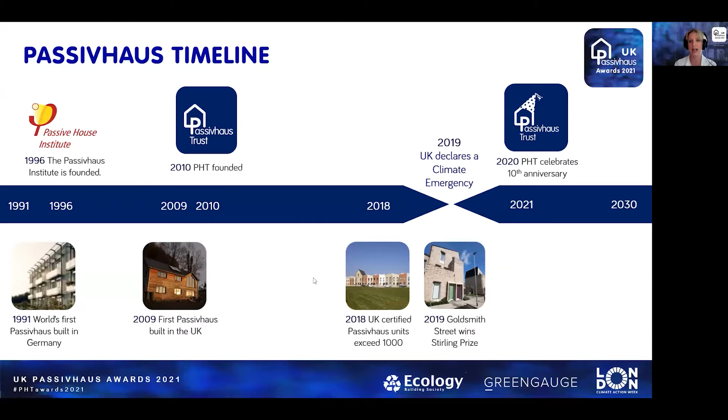The interest in and uptake in passive house across the UK continues to grow. That's most encouraging, especially as we're facing an inevitable climate disaster. We now have over 1,400 certified passive house buildings and more than 6,000 under development. And across the UK, we are seeing passive house projects grow in scale and complexity. Residential projects have gone from being single to multi-residential, new build and retrofit.

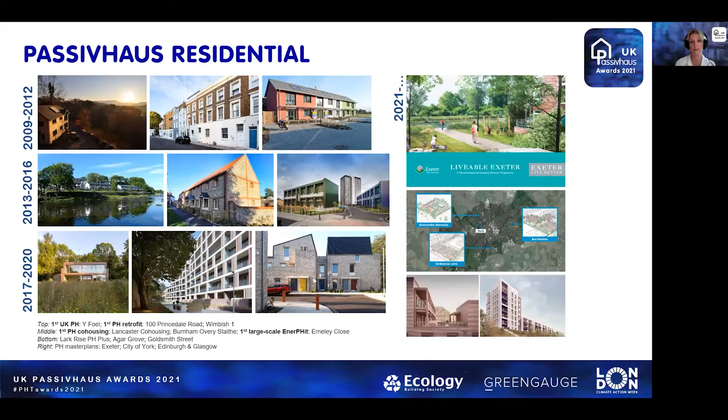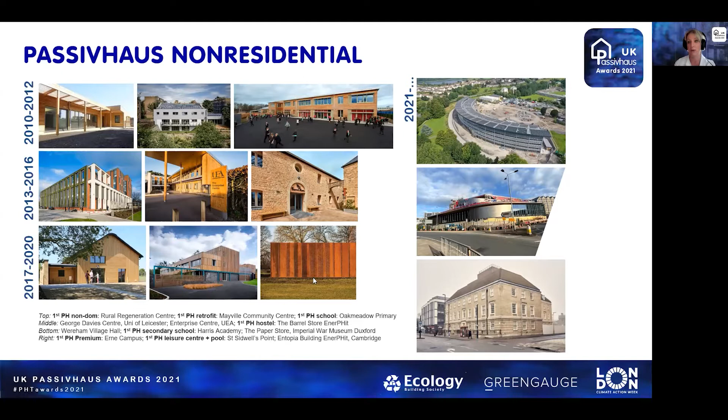We're seeing more large scale and high-rise projects, and passive houses also began to feature in master plans in Exeter, York, Edinburgh and Glasgow. Beyond residential, we are seeing a growing number of non-domestic passive house buildings, both new build and retrofit, from village halls to schools, university facilities and accommodation, offices, museums, leisure facilities and more. All of this in less than a decade.

Our programme this afternoon showcases the very best of the latest passive house projects from across the UK. You'll see 6 finalists across 2 categories, small projects and large projects, and each finalist will share a video of their project and give a short presentation on their entries. After the presentations, you'll have the chance to ask questions via the Zoom chat facility.

Now, these awards are very much peer accredited by the UK Passive House family. Our selection process has been 2-stage. A long list of entries were shortlisted by a panel of recognised and respected professionals, made up of John Bootland, Nick Grant, Hattie Hartman, Eugenie Patel and Lynn Sullivan. Our thanks and gratitude to each of them for their contributions.

The second stage was made up of 500 or so of the Passive House members who have voted on their preferences. So these awards reflect the opinions of many. Now, we do have a final category, which is the People's Choice, and this is where the wider public get to determine the outcome by voting via a live poll at the appropriate time.

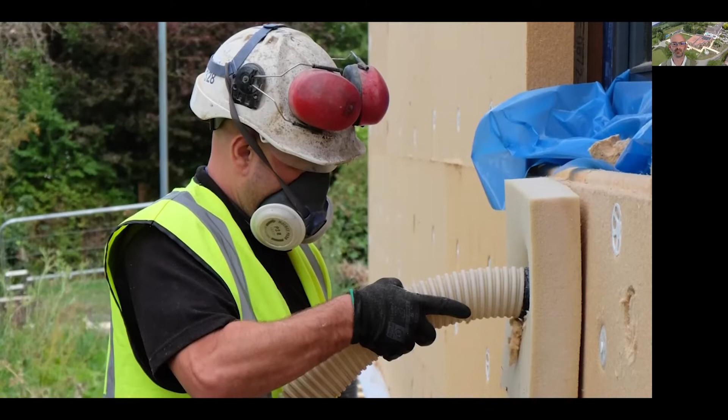It's lovely. It gives me a very nice aesthetic internally, and I've probably ended up with timber everywhere. There's nothing other than timber above ground floor. Everything in the walls as well, even the wood fibre insulation, yep. And then the larch cladding on the outside. The windows are timber, yeah. And of course along that way we also achieved some very good air tightness. The air leakage would fit on a penny coin, which is 244 times more airtight than building regulations would require. And as far as we've been able to gather, it's about the 3rd most airtight house in the world. Rather ridiculous and somewhat unexpected, because I did all the air tightness taping and it's just worked out very well.

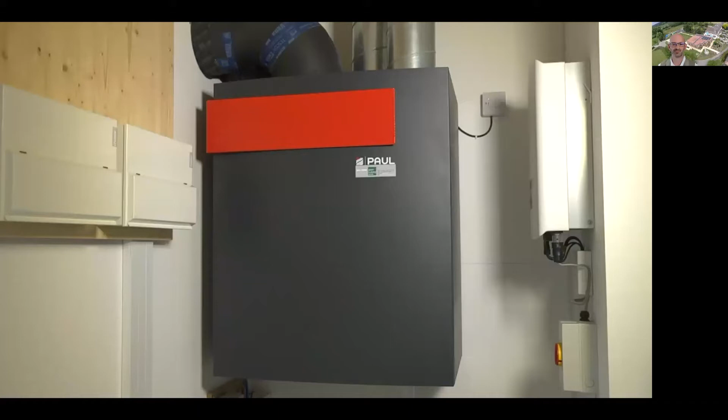So I've been through a winter. The heating went off early March and I haven't touched it since. It's very nice, very comfortable, and the air's great. It's all very even temperature around the house, which is one thing that you really notice with the mechanical ventilation, and it's really working well.

So Larch Corner is a timber lover's paradise situated in the Cotswolds area of outstanding natural beauty. The site itself enhances biodiversity with grasses and wildflower meadows, edible landscape, native tree planting, discrete permeable parking, and a sedum roof, which also attenuates rainwater runoff. From the cladding to the structure, from the insulation to even the light fittings, upfront carbon emissions have been considered. The windows frame the views, and there are 21,000 screws that fit into a design for disassembly strategy. The family home has wheelchair access, and space planning means there's privacy and a wealth of storage.

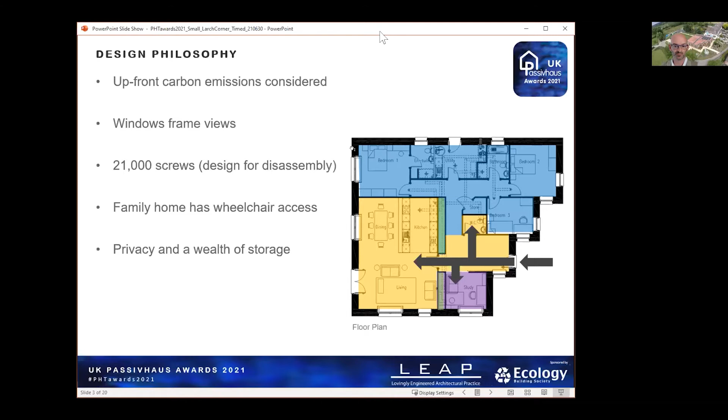Up on the right-hand side, you'll see the sedum roof, which also supports part of the photovoltaic array, and we've got a sawtooth profile that addresses the curvilinear road at the eastern side of the house, with south-facing windows making the most of the solar gains and the views available. The gargoyles on the roof gently throw the rainwater down onto the landscaping below, and the deep window reveals provide shading in the summer. The window seats that feature in a number of views allow you to take a pew and accept a view and even read a book. And the waste from the house that arose during the construction process was minimized as much as possible, and CLT, the cross-laminated timber, offcuts were used to make the dining table, for instance.

The ceiling heights vary throughout the house to accentuate different spaces, and the hallway includes space for a wheelchair and for buggies, so that Mick, an active grandparent, can accommodate his family. The storage wall has playful LED lighting, and the office has a fold-down bed, so Mick can give over the rest of the house to visiting family, and he's still got somewhere to retreat to. In terms of energy performance, of course, we tick all the passive house boxes, and most notable is the fact that the air tightness would fit on the square of a 1 penny coin. 244 times better than building regulations, 16 times better than the passive house standard would require. Needless to say, there was plenty of celebrating on the days when we got that result.

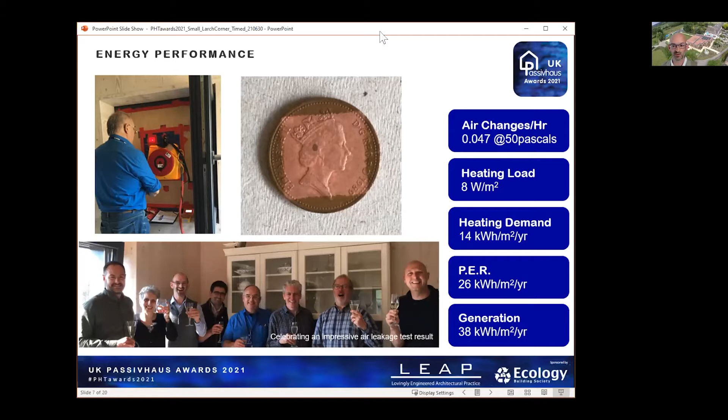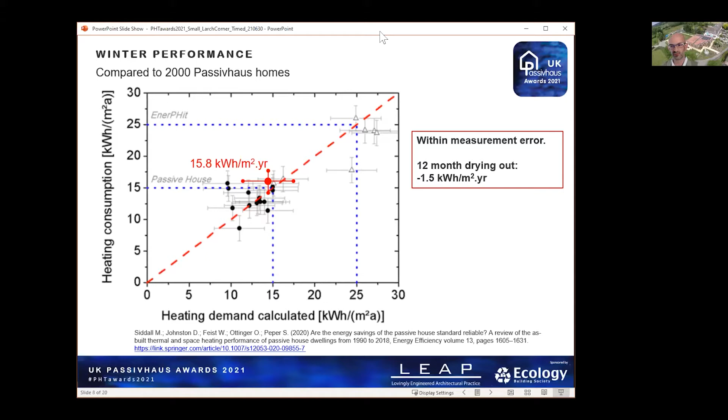In terms of the actual measured in-use performance, compared to 2,000 passive house dwellings in a peer-reviewed paper that I helped to contribute towards, we can establish that Larch Corner is using 15 kilowatt hours per metre square per annum on average, and that's within measurement error. And if we allow for a bit of drying out, then it firmly falls within expected boundaries.

In terms of summer comfort, we avoided overheating risks primarily by designing out excessive areas of glazing and designing for good standards of natural daylight. The certification exceedance of 25 degrees Celsius was expected to be around about 9%, but that was because of my undue concerns about insects inhibiting the opening of windows. In practice, what we've found is that the area weighted exceedance is 5.5%, which actually accords very closely with the Passive House Trust best practice processes there, which would suggest that the expectation from PHPP would be 4.5%. So we're in the right sort of territories in terms of correlations there.

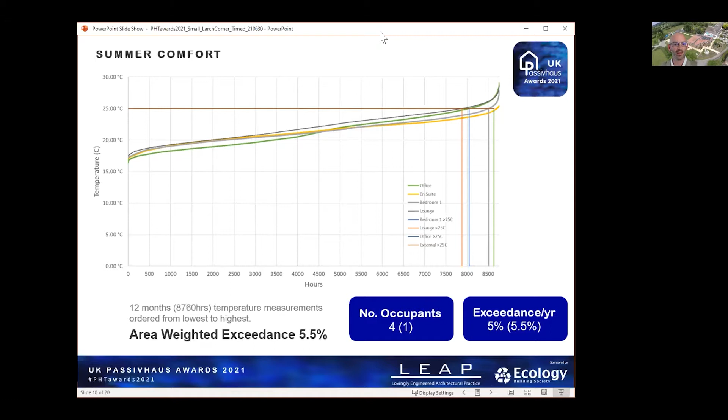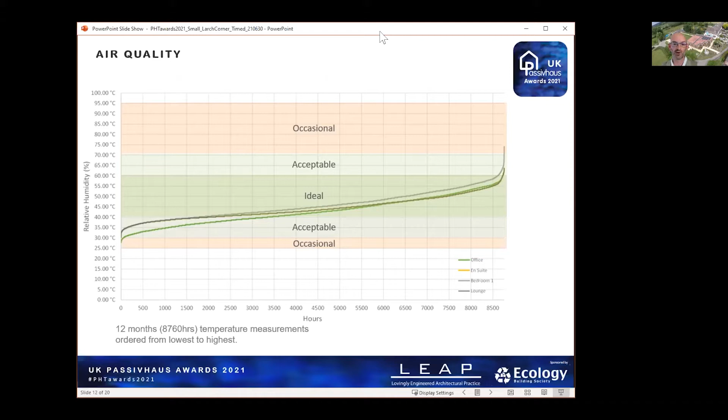In terms of indoor air quality, if we use relative humidity as a proxy, then we can see that the house remains within the ideal zone for around about 85% of the year, trimming down to somewhere between 30 and 40% for a limited period, because the house is occupied by one person, and therefore there isn't the same amount of moisture being generated as we may otherwise expect.

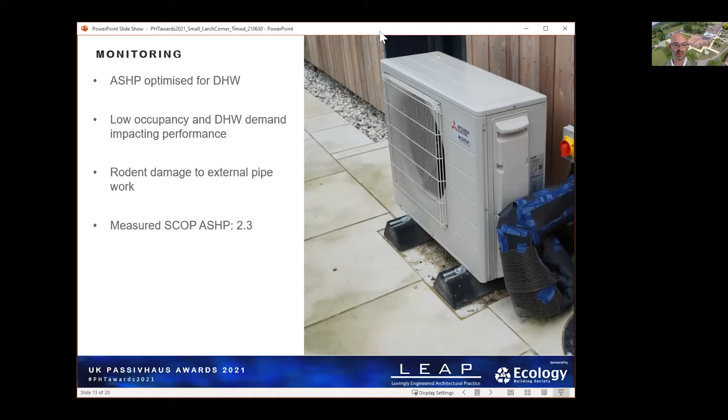So we could call this net zero in some contexts, but I think that would be a bit of a foolish game to try and argue. That's not how the ISO standards work. So more contextual thinking would be to recognise that the house achieves a 38% reduction in upfront carbon emissions compared to a masonry built passive house with external wall insulation.

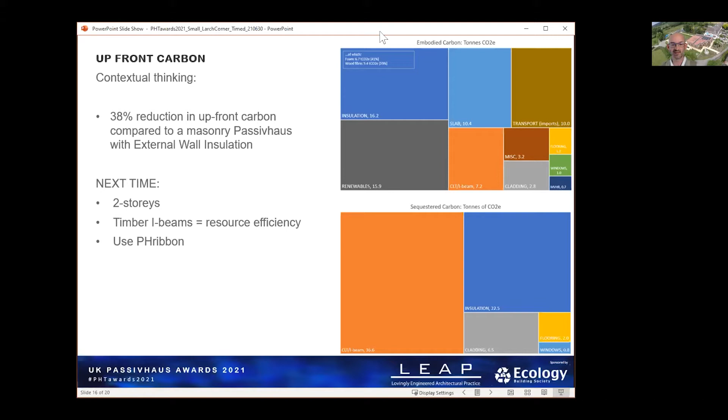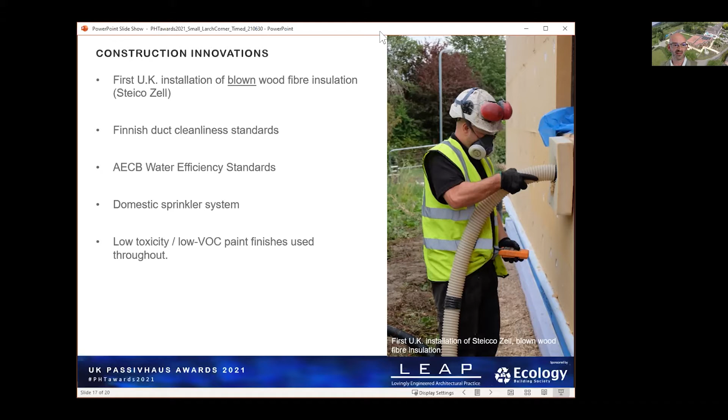Next time on a different site without the same planning constraints, we'd build to 2 stories, and we would also use engineered I-beams to improve resource efficiency even further. We'd also not necessarily invent the carbon calculation tool from scratch. We'd use PHribbon because that neatly plugs into PHPP. The house features the UK's first installation of blown wood fibre insulation. We used Finnish duct cleanliness standards to ensure good standards of duct cleanliness, because they're not picked up by passive house or building regulations. The AECB water standards were used, and we also included a domestic sprinkler system so that we could use low toxicity paints on the inside.

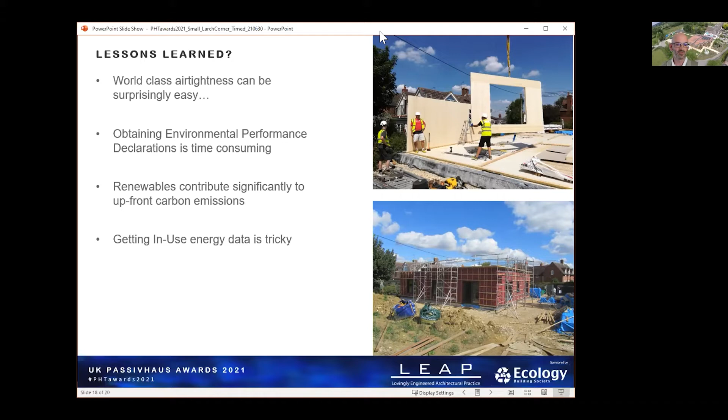Lessons learned: world-class air tightness standards can be achieved quite easily. Surprisingly, we did this by accident. We weren't setting out to achieve that. We wanted to achieve a passive house. Obtaining environmental performance declarations is time consuming, another reason to use PHribbon. Renewables contribute significantly to upfront carbon emissions, and getting in-use data can be quite tricky.

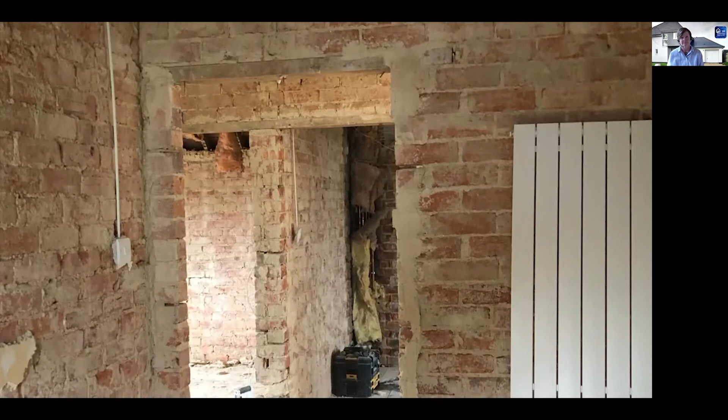One of the most interesting things for us right from the start was trying to change the mindset of the guys doing the individual work, and also changing the mindset with the sequencing. I remember you saying that you were going to target new build airtightness, even though it's a deep retrofit. And you achieved it. We said to Ruth right at the start, what do we do if we don't get it? And Ruth said, no, we will get it. Having now done it, you do it right, you do it methodically, you follow the processes, and you will reap the rewards.

Living in a passive house means that the temperature is very constant. It doesn't seem to vary very much. The house cools down slowly, and when the sun's out it heats up quite quickly. There are no drafts. And it's quiet. Yeah. And where we live is quite windy, so we've noticed that. Having measured embodied carbon on new build passive houses, even those that have got timber frames and timber cladding, your EnerPHit here is half the embodied carbon of a new build.

Thank you, Emma, for the introduction, and I'm delighted this project has been shortlisted for this award. It's been a fantastic project for us, deep retrofitting this existing building to create an ultra low energy, low carbon home for my clients, Dave and Julie. This original 1930s home is typical of much of our housing stock in low density neighbourhoods across our country, with cavity wall construction and a pitched roof. I'm delighted it was certified Passive House EnerPHit in 2020.

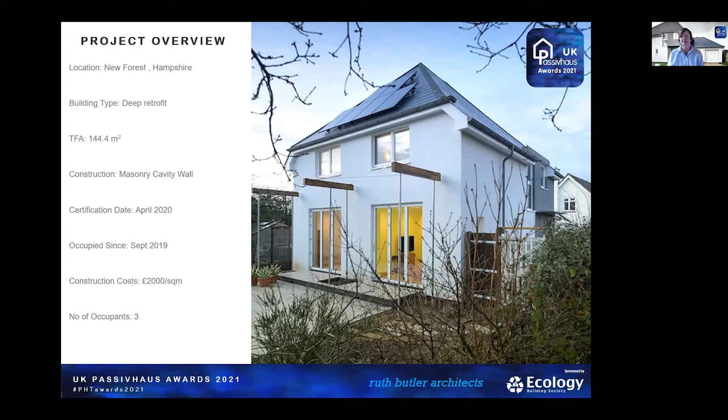Dave and Julie didn't want to move from their coastal location and from this view at the end of their road in the New Forest, but they did want a comfortable, low energy home. So we worked quite hard within the constraints of the existing site to make sure that we could achieve their ambitions.

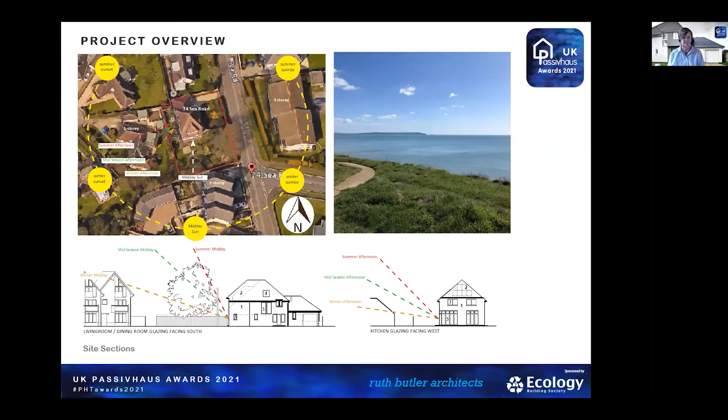The design philosophy was to create a contemporary open plan home that was super comfortable and low energy. And as keen design gardeners, they also had to have great indoor-outdoor flow. We rationalised the interior layout, we knocked down walls, and we created a new garden design and terrace. We introduced new high-performing bifolding doors to increase the amount of south-facing glazing, to optimise winter free heating, and to bring views of the outdoors in. A generous kitchen sits at the heart of the house.

It was important to create robust details for the main thermal elements and to reduce thermal bridging at existing building junctions. The walls were wrapped with external wall insulation, the wall cavities were filled, and the loft and floor insulation was added.

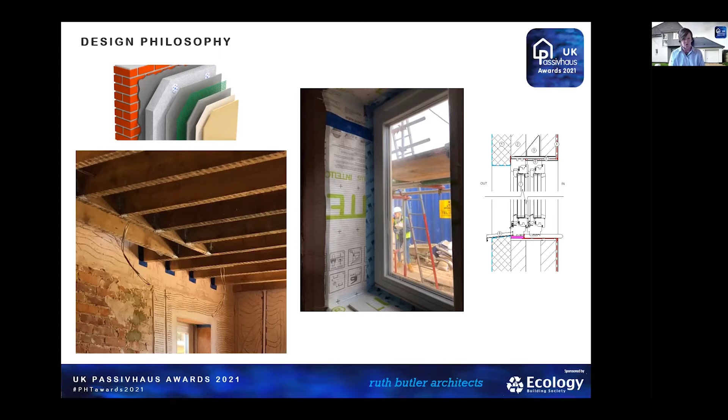The air tightness solution was a combination of parged walls and air tightness membranes for the floor and the ceiling. We paid careful attention to the junctions of the floor joists, the windows, and a new floating floor for the ground. An air tightness of 0.5 air changes an hour was achieved, bettering the new build standard.

The building services strategy was to keep it simple, reduce the amount of kit, minimise distribution of services, and adopt an all-electric solution ahead of the decarbonisation of the grid. One electric radiator is all that's needed to heat this house.

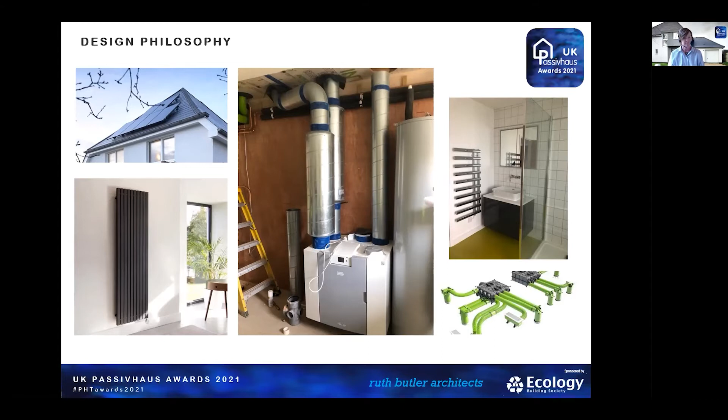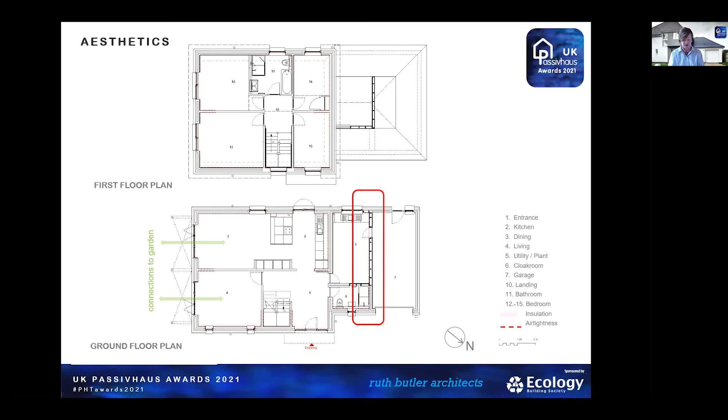These are the floor plans for the building. One of the more complex areas was thermally separating the integrated garage and providing a new utility and plant room space. We needed to find a door that was both Passive House certified and half an hour fire rated to go between the house and the garage, and discovered there was only one product in the UK available to do this.

Aesthetically, the interior remodelling brings good daylight into the heart of the house with a new open tread oak staircase, larger doors and big windows. Natural materials were chosen throughout, including cork and timber floors. To the south, a new simplified elevation removes an old dormer window at first floor level to promote better headspace in the bedrooms and give roof space for the solar panels. On the ground floor, the existing conservatory was demolished so that living spaces could connect directly to the garden.

External insulated render provides a clean contemporary line in keeping with the house's 1930s origins and the existing streetscape. And a warm, draft-free interior allows Dave and Julie to live in the whole house, no longer needing to close off rooms to keep warm.

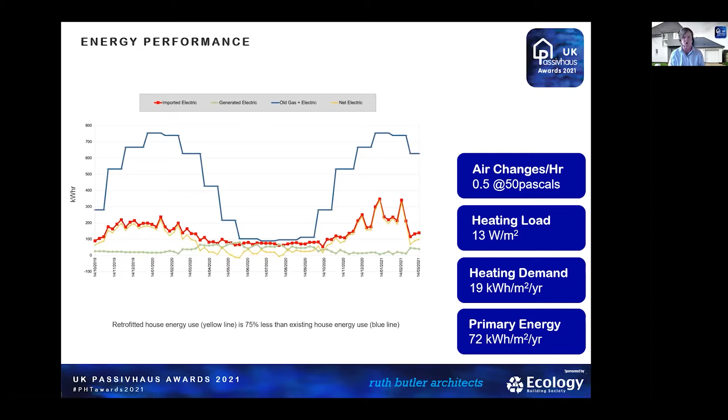The client has been monitoring energy for over 2 years now, and the graph shows the monthly kilowatt hours for a 1-year period. The retrofitted house whole energy use is the bottom yellow line, and the pre-retrofit energy use is the top blue line. And the house now uses 75% less energy than it did before. The combination of winter solar gains and 1 radiator is enough to keep the house fantastically comfortable and draft-free in winter. And this is much valued by Dave and Julie, who previously struggled to keep warm, wearing jumpers and slippers for most of the year.

The summer shading is achieved with a deciduous planted arbour, connecting the house to the garden and giving a shady spot to sit, while the existing masonry walls provide good thermal mass and coolth to the interior.

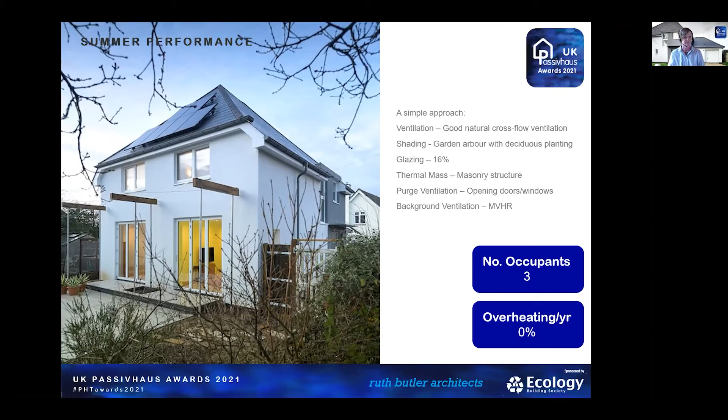One of the key challenges for the project was following the insulation and air tightness line through a myriad of existing construction details. Particularly difficult was the ceiling skeilings at first floor level and also the internal garage. We used PHPP to test the options and make sure that we were in compliance at all times.

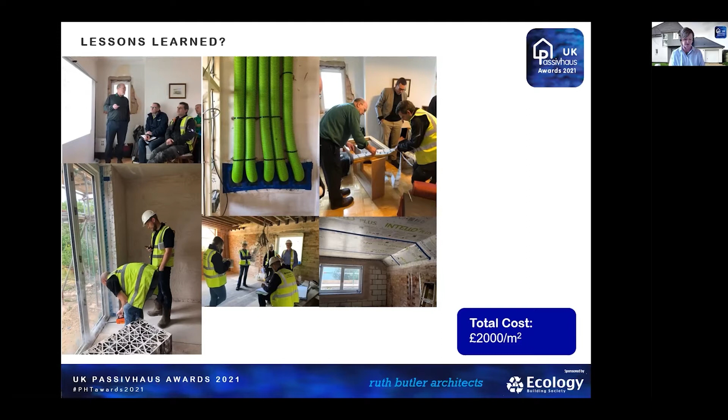So in terms of lessons learned, the 3 key ones were that the pre-construction workshop that we held before we started on site was pretty essential for team building. The M&E installation could have benefited from closer supervision on site. We had a couple of things we needed to keep an eye on. And the Air Tightness Champion was probably the most important person on site.

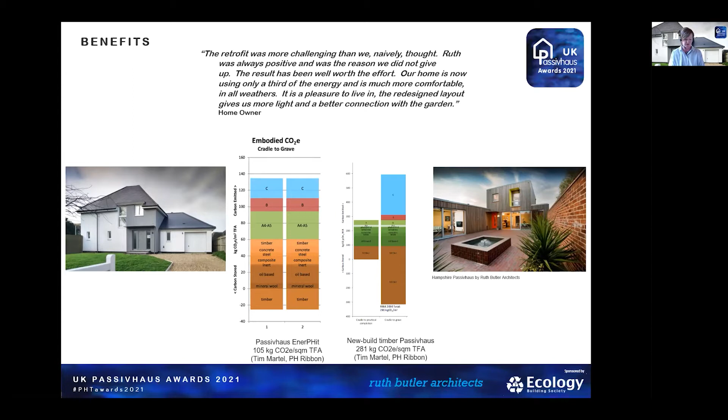Dave and Julie are delighted with their new home. It secures their retirement future in this much loved part of the country. And for me, measuring whole life carbon has been an important benefit. This deep retrofit is less than half the embodied carbon of a timber frame new build. This is a ready to deliver example of the performance and comfort that could be achieved across the existing UK building stock by deep retrofitting to Passivhaus EnerPHit standard, meeting the government's targets to achieve net carbon zero by 2050.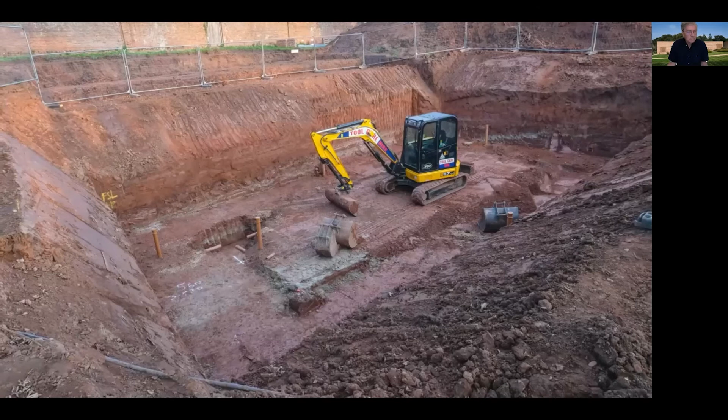So good afternoon. This is one of those now for something completely different moments, as Emma said, because I'm the client and not the architect. Or at least I'm one half of the client and not the architect.

So our project's a new build in Devon, designed by McLean Quinlan. It's around 360 square metres TFA, single-storey house with a partial living basement under about a third of it. We bought the plot in late '14, started building in late '17, and moved in at the turn of '18-'19. So we've been in here for a couple of years now.

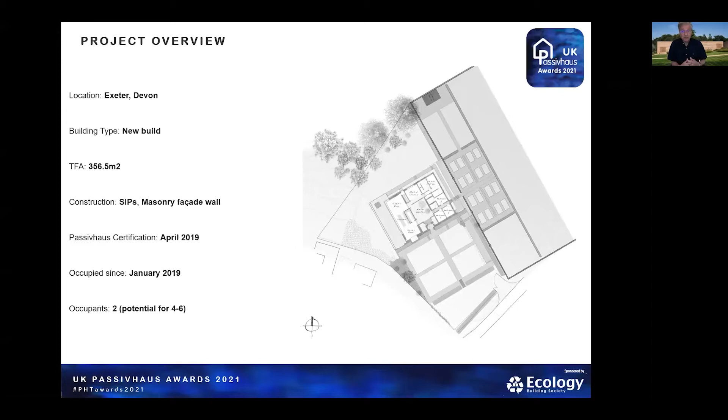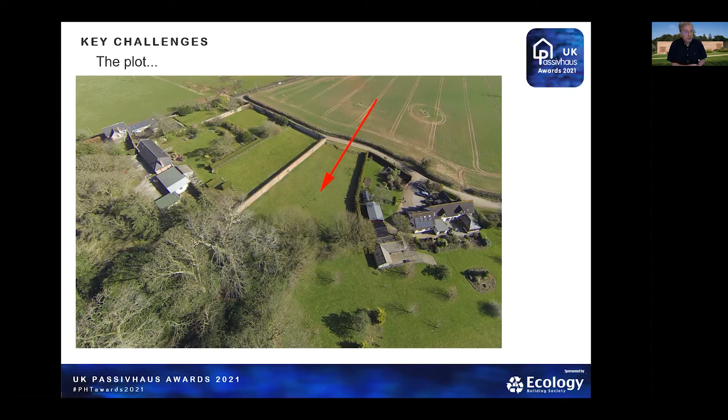The first challenge was the site itself, which, as you can see, is dominated by this tall red brick wall of the old kitchen garden. But the big challenge was that local planning declared it to be an isolated house in open countryside. So we had to go the paragraph 55, now 79 route of the National Planning Policy Framework. And this in turn meant that an independent design review panel had to determine that it was truly outstanding architecture, raising the standards of design in rural areas.

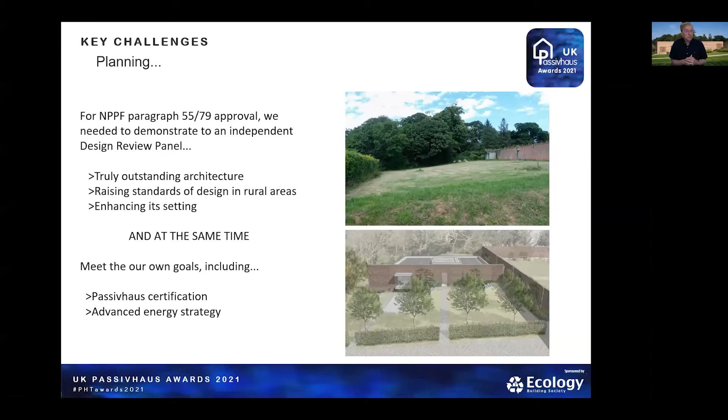And then, of course, we had our own client brief, which included Passivhaus and energy goals, which were not necessarily complementary to the Para 55 requirements. But we succeeded in getting that. And here's the house that McLean Quinlan designed. The front facade wall is designed to marry to the old kitchen garden wall. And I should also say that our landscape designer was my wife. So she's done a lot of planting in that.

And the other side of McLean Quinlan is, as well as designing the externals, they design all the internals of the house. So that's the decoration, the interior joinery, lighting, kitchen, and all the fittings. And we've used a lot of natural materials in the house, including pure clay plaster, which is very nice to look at, but also a much more sustainable alternative to normal plaster and paint finishes.

And erection on the site was a manual process done by a team of 5 who basically constructed most of the house, including floors and roof. At the same time, all the windows, roof lights, and the final roof membrane were installed. So we went from bare slab to first fix in about 2 months.

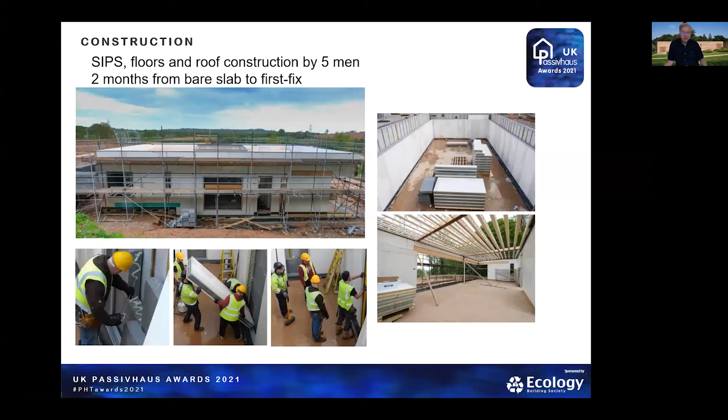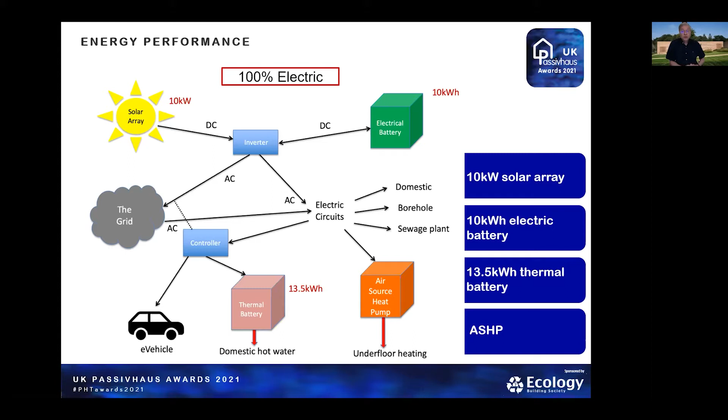Looking at our energy system, we're 100% electrically powered because we have a private borehole and a private sewage plant on top of the usual domestic circuits, including the ASHP. So we just have one utility company to deal with for all our outgoing bills and our incoming feed-in funds. We also use thermal and electric batteries to optimize our solar power use, and we have an e-car on order.

So after 2 years experience, performance has exceeded expectations. The headlines are that we're around 40% power positive, CO2 negative, and running cost negative. Unfortunately, we couldn't go for Passivhaus Plus because of our relatively large footprint, as we're mostly single storey, as you saw.

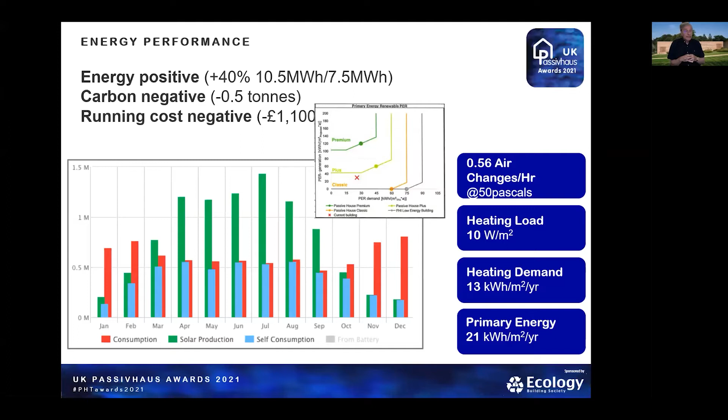Now, as well as the house, the landscape contributes to our ecological performance and carbon offsetting. We've done a lot of planting, including well over 100 trees and over 300 metres of hedges. And after many years, the kitchen garden's now supplying food again. The birch copse on the southwest is also intended to provide solar shading. Obviously, the more so, the more it grows.

Summer overheating was noted as a potential risk by our certifier, but one that could be ameliorated by window and door opening. And in practice, we found that we can control it. We cut radiant heat by closing the big blind over our central roof light, and also the roller blinds and the Venetian blinds in the main living room and in the bedrooms.

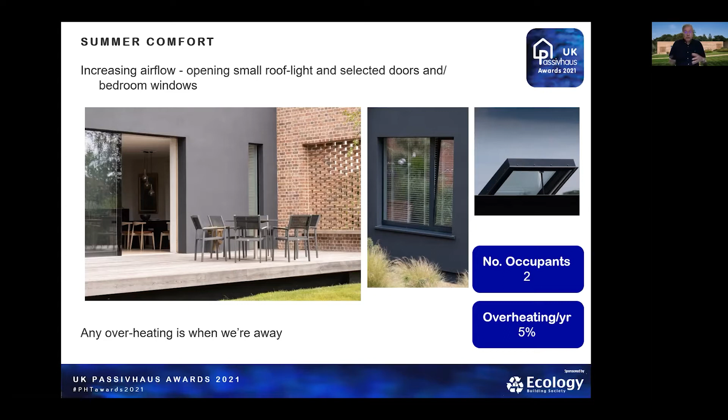And then we get airflow going, usually by opening a relatively small roof light on the roof and a sliding terrace door, and possibly other doors and bedroom windows. There's a door on each axis of the house, so we can usually get cross ventilation going quite easily. So almost all our overheating turns out to be when we're away, meaning that we can't open the doors and windows. So in winter, I think the subjective thing we notice most is that we're often surprised when we step outside and find that it's cold.

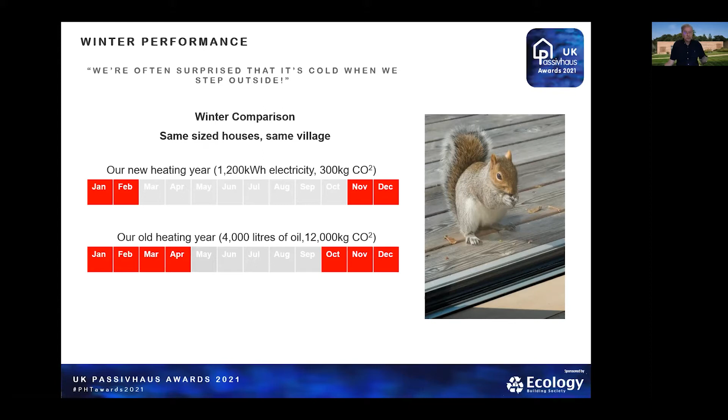And we can also do a direct comparison with our old house, which is a couple of 100 meters away, in that our heating year is now 4 months rather than 7 months. And we're generating only about 2.5% of the carbon dioxide that we used to generate. So overall, the benefits, both comfort and performance, we found have easily delivered on the Passivhaus promises.

And one thing we've found in personal behavior is that we've started modifying our behavior by watching the solar array monitors, a bit like you modify your driving behavior when you watch the battery in and battery out on an electric car. So as was said, Passivhaus certification was a first for the architects and builders. So that in itself meant a lot of lessons were learnt.

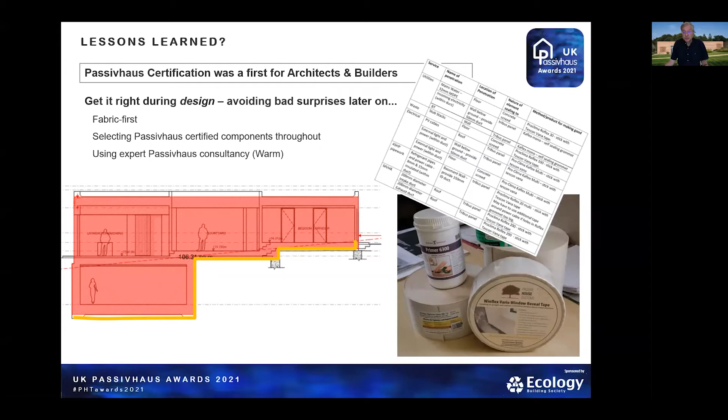And we tell anyone who went down this path that getting it right, testing it with PHPP in the design stage is absolutely what you need to do. And as a result of doing that, we had no nasty surprises later on. We had a great team and everyone was on board with the Passivhaus goals and techniques. And also, since many of the main components like windows were Passivhaus certified, the subcontractors fitting them tended to bring Passivhaus know-how and experience to the project and pass it on to the less experienced teams. That was because there was good communication and a good relationship between all our teams.

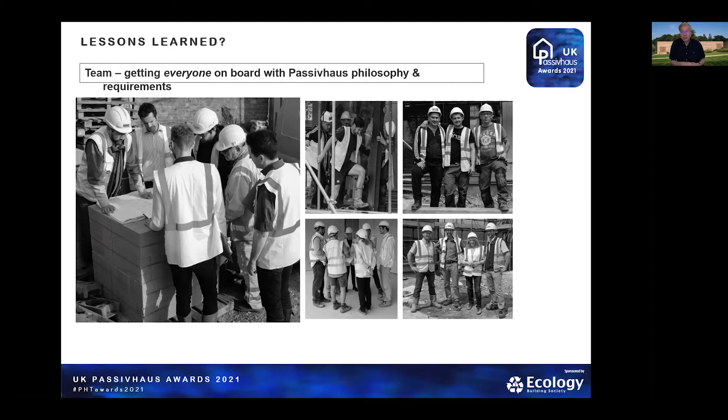And the other thing we learned, of course, was that a critical component is the Passivhaus champion. And for us, this was our project manager, Russ Hancock, who became a convert from the start. He did the training, kept the book on his desk, trained the subcontractors, and where necessary, he checked everything and everyone every day. And personally, he even did a lot of the taping at the end of each day.

Now, recently, Justin Bere made a good point in a RIBA conference that beauty and performance are entirely compatible. And the RIBA Awards are increasingly requiring the Passivhaus approach as they head to their 2030 challenge. And it's great for us that we're currently shortlisted for the awards. Of course, we're not the first in this respect, but we're still very much in the minority. And we believe we can help spread the word.

And one of the ways we've done that is by getting into a lot of architectural journals. And I've given talks to local eco groups on Passivhaus. And also we've chosen Passivhaus in our project name to draw attention to the Passivhaus aspects of it, even though I can assure you it's not the name that's on our gate, although we have the plaque right near our gate.

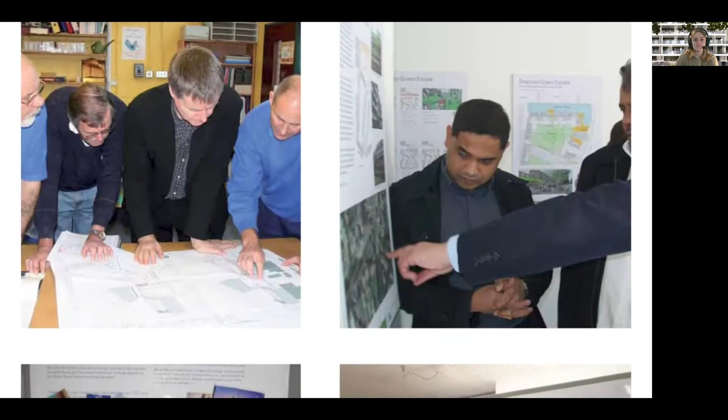Before the development, the estate was a number of H-shaped blocks, and the homes were cold. They had lots of damp, very drafty windows, expensive to heat. We consulted with the community. Once we understood that residents wanted comprehensive redevelopment, this would be Camden's largest regeneration redevelopment scheme. And so there was a desire to do something extraordinary.

One of the things that's really struck me about this process is actually the comfort and the positive benefits that a passive house building can bring. It would address the fuel poverty on the estate. It would mean that we invested in more passive measures, and we already had to do some of those things, so triple glazed windows because of the railway. It's been absolutely great that we've been able to demonstrate it on this scale, and with the future master plan of nearly 500 units we're going to be at soon.

One of the really informative parameters for the master plan actually wasn't passive house. It was actually keeping the community together. So everyone stayed here. They watched their new home being built and then moved in. And what that meant was the master plan's quite granular. It's like a puzzle where we did it in quite small phases.

The palette of materials is deliberately simple. It's brick, concrete, banding, a little bit of muted colour. And when you look at the future phases, they sort of use the same DNA. This generous balcony that goes across the whole width really helps the control of solar gain from the south. And that's just demonstrating how really well thought out solar shading can actually help.

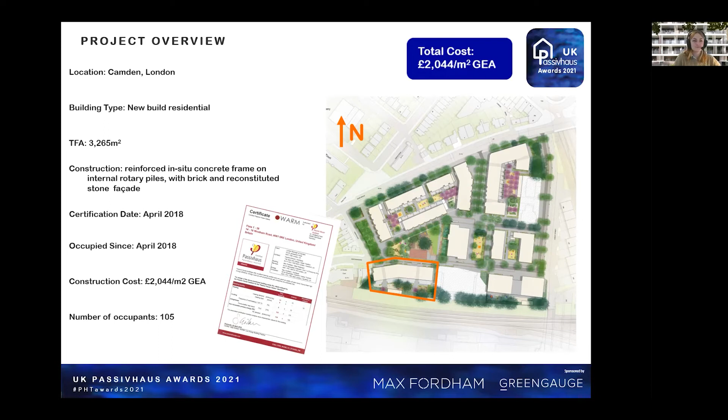The success of the project wouldn't have been possible without a massive deal of effort from a cast of thousands who I'm representing today, and from the amazing spirit of collaboration that we all shared on the project. Another key factor in success was the fact that the Passive House brief was championed and supported by Camden, our client, throughout the design process.

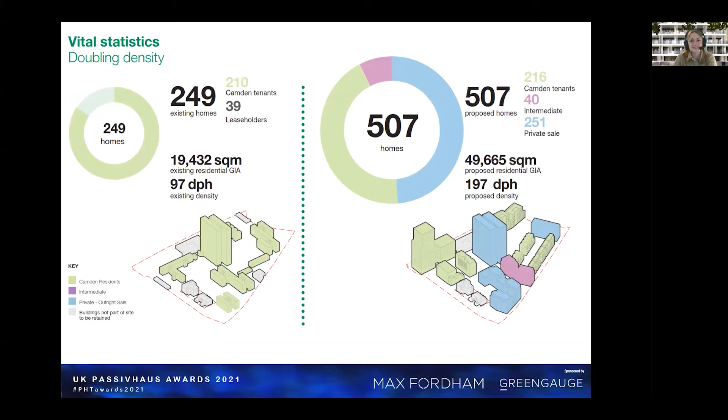The existing homes on the estate were undersized, as well as poorly laid out and disconnected from the wider context. The local residents voted for redevelopment, and the proposals double the density of homes on site, which leads to bigger, better, low energy and fit for purpose homes for the existing residents, subsidised by the market sale homes. This is a visualisation of what the regenerated Agar Grove estate will ultimately look like, and the site is bounded by 2 railway lines. Phase 1A is completed, 1B is about to be finished, and 1C has started on site.

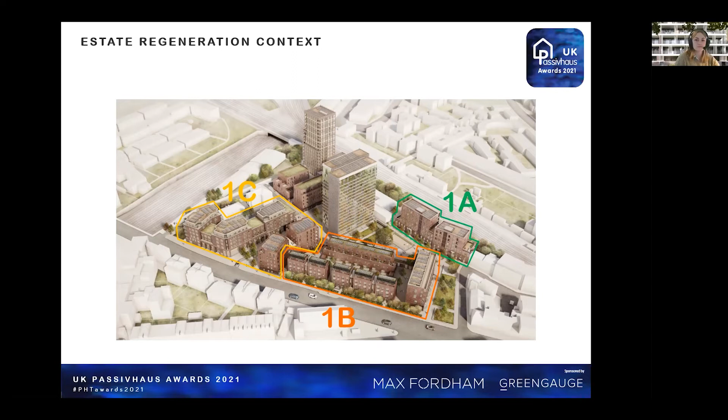At the heart of the design philosophy was Camden's goal to tackle fuel poverty and to provide low carbon homes, improving the quality of life for the estate's residents. Another key design principle was simplicity, using an efficient form and good detailing to simplify other aspects of the design and to reduce maintenance requirements and life cycle costs.

The existing estate was home to a thriving community, and it was important to Camden to retain this. The master plan was developed around a single decant promise, so the residents would be able to stay on site and move straight into their new homes, which has led to a series of smaller development phases, with 1A as the first part of that.

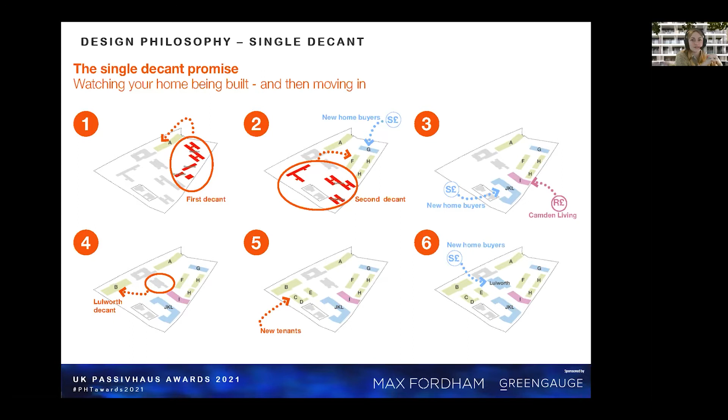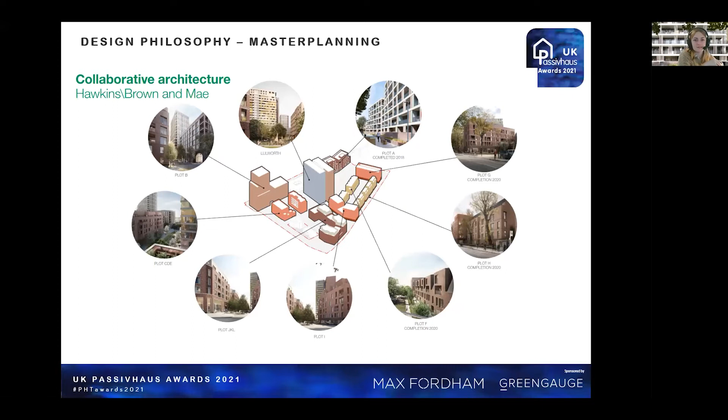Hawkins\Brown and Mae worked together on the master plan to provide different but complementary visual identities around the site. The design creates community through a series of streets and squares, and with an awareness of the wider context of the surroundings. Block 1A has a north-south orientation, which is well suited to Passive House. Some of the other phases have different orientations, which will be more challenging.

During the planning, we proposed that a Passive House development with communal heating would perform better in use than a non-Passive House development with district heating, even if they looked similar in SAP models. Our research was enough to persuade the GLA and to obtain planning permission for one of the first large-scale residential Passive House buildings in the UK.

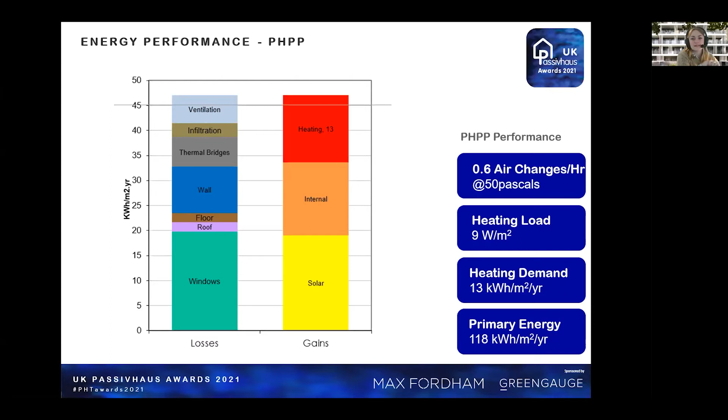And here is phase 1A's energy performance from PHPP. It was deliberately designed to come in a little under the classic targets to allow for the unexpected. The actual occupancy for the site in use ended up being larger than we expected in the model, with 105 people in reality compared to 81 from PHPP.

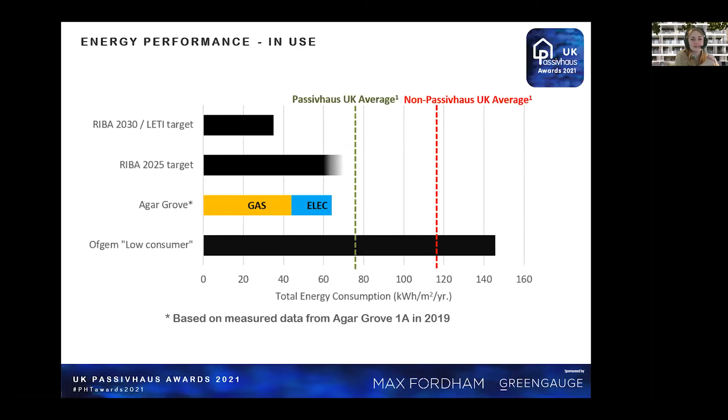Agar Grove's measured energy use achieves the RIBA 2025 target, or it did until about a week ago when the target got reduced. The performance is lower than the UK average for Passive House buildings, based on research from the Building Performance Network. And in order to get to the 2030 target from RIBA, we would require a low carbon heat source.

Our in-use heat losses ended up being higher than we had modelled, and this was partly because the boiler flow temperature had to be increased slightly to improve the controls operation and the stability of the HIUs. The performance is good considering that it was designed before the CIBSE Heat Networks Code of Practice was released, but there is room for improvement.

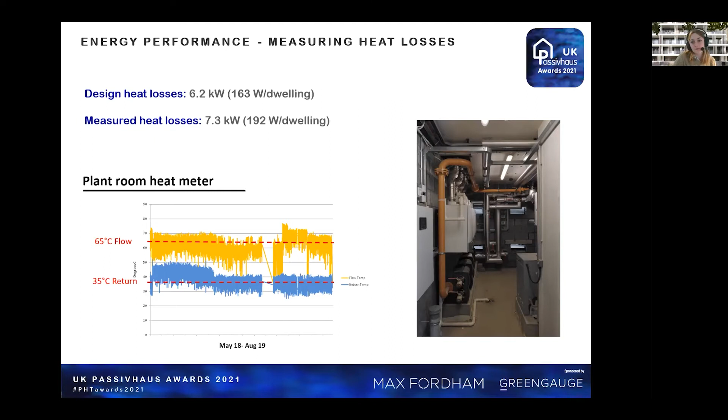We monitored the temperature and other parameters in 3 sample flats, and the data demonstrates that the temperature never drops below 20 degrees in winter. The winter heating strategy also benefits from solar gains coming through the generous south-facing balcony windows that are shaded by the overhanging balconies in summer.

A little more on the summer comfort strategy is that it was based on a few key principles. Firstly, minimizing internal heat gains, which was done through insulating pipework effectively, creating a lean pipework design, minimizing lateral distribution pipes, and with low LTHW running temperatures. The glazing was strategically sized with the balconies blocking peak summer sun, and we had large openable windows for purge vent.

The flats provide comfortable, spacious living environments for the residents. And feedback collected by occupant surveys showed that people noticed a real improvement in air quality and that the residents love the spacious balconies and the secure rear garden.

The northern facade has less glazing than conventional multi-residential projects, but it has insulated side panels which make the openings look more generous. The shared entrances have a view all the way through the building into the garden at the rear. And due to the narrow gauge of the block and the internal glazed screens, this allows views and ventilation through the whole building.

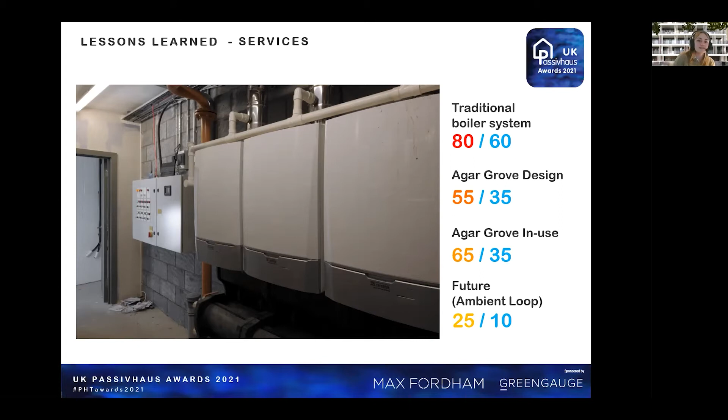Running communal LTHW systems, such as our boilers here, at lower temperatures pushed the then available technology to its limits. And you can see a range of temperatures in degrees C of a range of different systems on the slide. Heat pump systems with ambient loop distribution would be optimized to operate at these lower temperatures and are being used on Agar Grove Phase 1C.

I'll wrap up by saying Agar Grove Phase 1A has collected various awards in its lifespan so far, and it has paved the way for future large-scale Passive House developments, proving the concept and contributing to overall upskilling of the industry. Thank you again to everyone who made it possible, and thank you for listening to this presentation.

Thanks, Katie. Okay, we've got plenty of questions that have come in for this project. So I'm going to kick off with questions, firstly from George. George's got a question on whether or not you've had any feedback from residents on how the homes are performing now during warmer summers and potential heat waves.

Yes, so we have carried out a couple of occupant surveys. The whole design team collaborated on these and it was led by Camden. So we had questionnaires and we went around knocking on doors, asking people both qualitative and quantitative questions about their experiences, as well as the monitoring that we had. The summer that we did that was one of the hottest summers that we had on record. It would have been 2018. And we found that people had, in some cases, been experiencing quite high temperatures.

And so it was part of working with the residents, because in passive houses the ways to keep them cool are perhaps different to what people might expect in older, leakier properties. So things like helping people understand that closing the blinds to block out the solar gain might be ways to keep it cool. But unfortunately, we haven't yet been able to analyze another round of data to see if that improved the next year. But yeah, I think it was mixed, and we're hoping that it will improve over time as people figure out the best ways to keep their flats cool in summer.

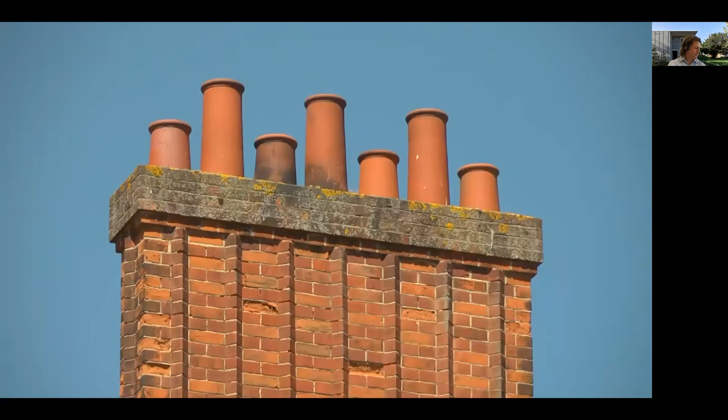We couldn't accommodate many of our graduate students, but we also don't have a great deal of land to develop on. This, what effectively were 3 large gardens, lent themselves to developing. We're in the West Cambridge Conservation Area, an area which is very prized and very heavily protected by the local planning authority. So we had to work very carefully, creating buildings that wouldn't harm but would improve the conservation area over time. But what the students wanted to achieve was a low carbon output, and their target really was to not have any gas in the building at all.

Kings are used to owning buildings and maintaining them for decades and hundreds of years. We were looking at what's the best value for the college over the kind of timescales that they're used to thinking of, and so Passivhaus became one of the options for that discussion. If you remember, we went to Norwich, looked at the enterprise building, and I remember the minute I walked into the building I was sold. I said, yes, this is going to work for our students.

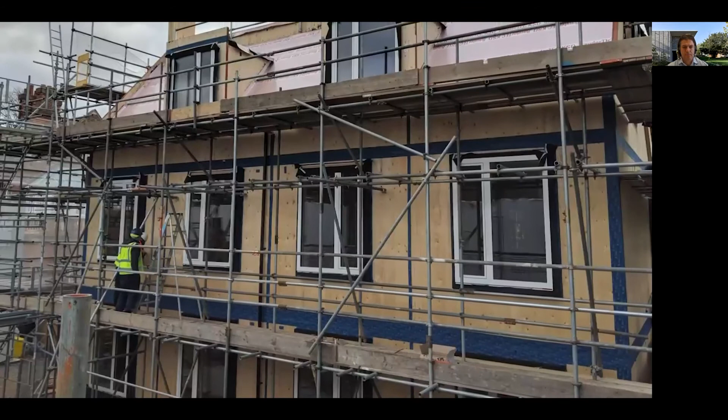And I think the challenge from the project's perspective was marrying that environmental performance with an architecture that is permissible in this part of Cambridge. There's 2 kind of architectural responses and skins over the building, but the skeleton of both of them is the same timber-based CLT construction, so that's worked really well in terms of limiting the embodied carbon of the scheme, and also was a great way of getting the air tightness that we needed to achieve Passivhaus. 2 lovely old buildings is now 4 amazing buildings that will accommodate 45% of our graduate community.

We saw the difference when comparing it to houses where we were living in before. The room is soundproofed, the temperature is always under control. It was a nice space to live in. A number of other colleges are now looking at going in this direction, and I think it's important that we do for the future.

Everybody, here we go back on. Great, thank you very much.

Hi everyone, I'll be talking about Cranmer Road, which consists of 2 new build graduate accommodation buildings for King's College in Cambridge and some associated landscape works. The buildings were occupied in late 2019, so just in time to get nicely bedded in before a global pandemic hit. The genesis of the project was King's need to accommodate their growing student population. So before the project, they could house only about 50% of their graduate students. There's limited real estate within Cambridge, so developing on land the college owned was attractive, and there was also an opportunity there to help develop the student community on the site.

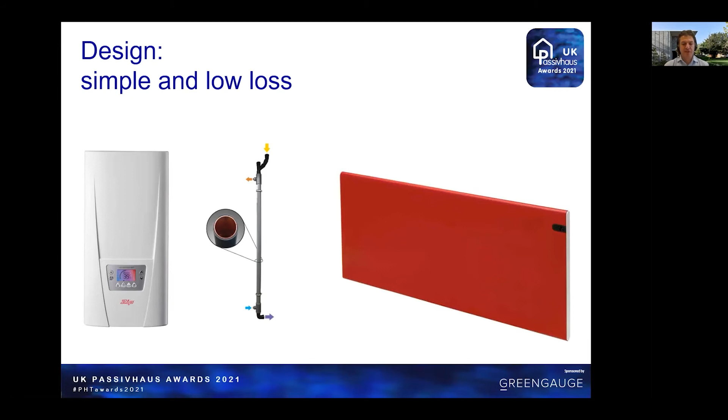The energy strategy of the buildings was designed to be as simple as possible, so efficient and to minimise distribution losses. Domestic hot water is produced by instantaneous point-of-use water heaters with wastewater heat recovery and low-flow sanitary ware. Space heating is by electric panel rads with local control.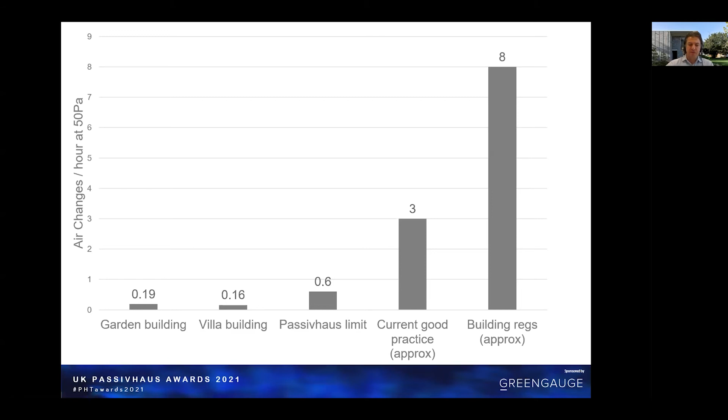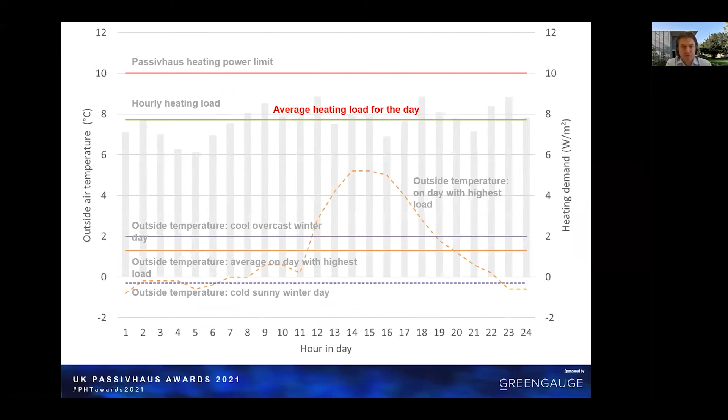We measured the day with the highest heating load, which is shown on the graph here. So the outside air temperature shown in the horizontal lines for the orange, and that was in between the 2 days that PHPP uses as a test. The average heating load, so the green horizontal line, was just under 8 watts a square metre. So we're happy with that compared to the Passivhaus targets.

Although the peak heating load was low, the heating demand figures have been a bit higher than predicted. And we think this is largely due to students wanting their rooms hotter than 20 and learning how to override the temperature controls on the radiators to achieve this. We're using a modified system in subsequent projects to give students some control, but reverting back to a reasonable base temperature after a few hours.

Another lesson learned has been around student showering. So PHPP is based on 5 minutes per shower, 0.7 showers a day. Energy Saving Trust figures suggest, in the UK, it's about 7.5 minutes a shower and 0.8 showers a day. And feedback from students shows plenty of them take more than 20 minutes because that's when the lighting controls plunge them into darkness.

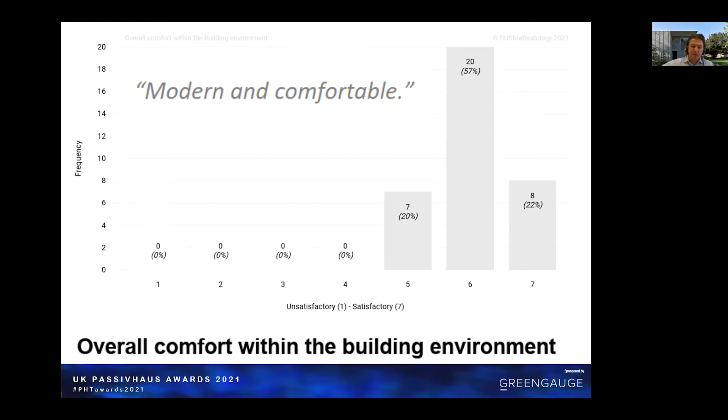As you'll have heard from the video, the feedback from the college has been positive. They're developing buildings elsewhere in Cambridge, including another project with accommodation for 60 graduates and 24 apartments for fellows. Following the Cranmer experience, this project is also pursuing Passivhaus and incorporating a lot of the lessons learned from Cranmer.

One of the things we've liked beyond the buildings and the landscape themselves of the project is the legacy that it's generated. So all of the original design team are now working on other Passivhaus projects, sometimes together and sometimes apart. This is one of the earliest Passivhaus projects for us at MF, and it's the first for both the architect and the structural engineer as well.

And it also seems to have contributed to a spread in Passivhaus within the University of Cambridge. Obviously, we're not claiming sole credit for this. There's a national increase in Passivhaus, which is brilliant. But given all the discussion around exponential growth and pandemics in the last year, it's nice to see something where an R value of more than 1 is a good thing and to be welcomed.

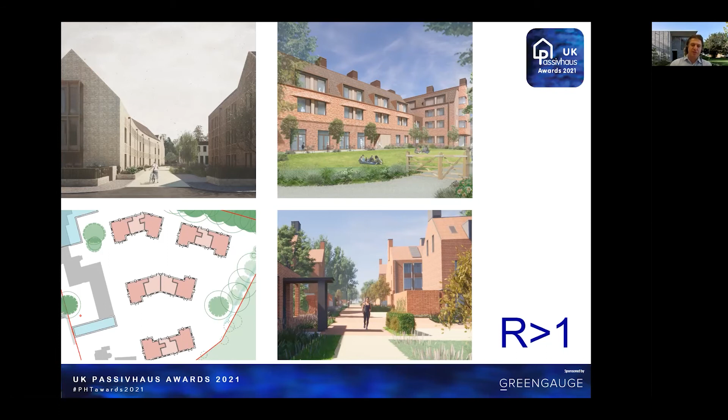So thanks for your time. I'd just like to finish off by crediting some of the key organisations involved in the project. So obviously King's College as the clients, Allies and Morrison architects, Smith and Wallwork structural engineer, Faithful and Gould as QS and project manager, RG Carter as the main contractor, and of course WARM as the Passivhaus certifiers.

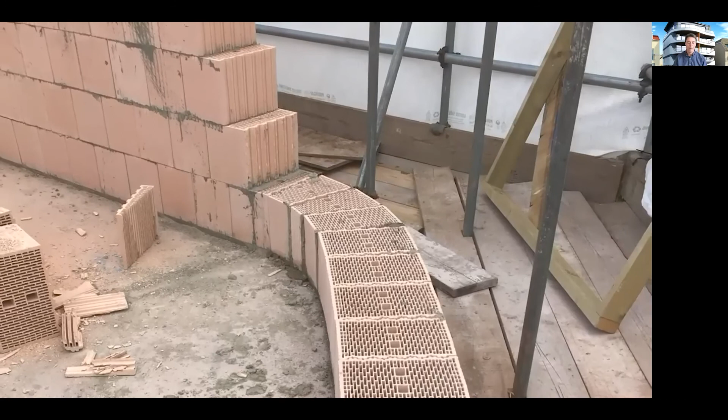It's a very tight site. We're building right up to the edges as well, of course. We're using mineral materials like Porotherm clay blocks as insulants in here with a timber frame construction and cellulose fibre in the upper floors, with the whole principle of trying to avoid plastics wherever we can.

Whilst we could have made more money here, we didn't. We sacrificed a little bit of margin for the environment, but I think it's the right thing to do. And it's a shame that more developers don't embrace our thoughts and just stop talking about it. There's a lot of greenwash out there, and just do it.

Our journey began in 2015 when we saw an old house whilst walking along the seafront with some friends in Seaton. I spotted the development potential, and having best guessed some costs and margins, I phoned a close friend and asked to borrow £3 million. After 3 days of anxious waiting, he said yes. Seaton Beach began, and with the support of my long-suffering wife Audrey, we cracked on.

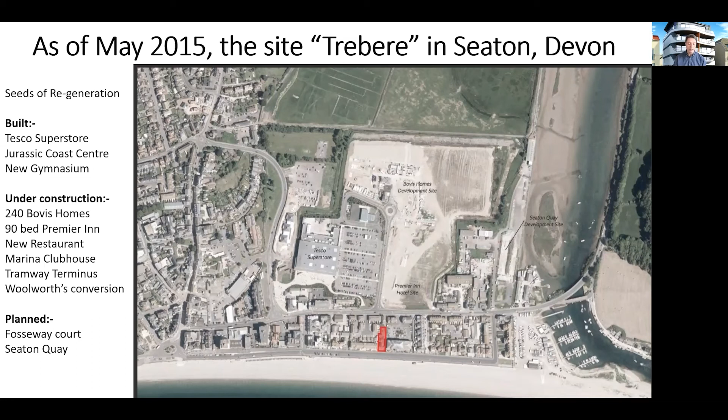Seaton is a seaside town on the south coast of Devon between Sidmouth and Lyme Regis. Despite being on the Jurassic coast, house prices in Seaton were low in 2015 and did not support iconic architecture. We took the gamble anyway and just did it. Within a week, we had secured the site, and Clifton Emery architects in Exeter were appointed and gained the planning consent after a long battle with East Devon District Council.

The old house was very inefficient in both its land usage and its energy consumption, as demonstrated by the EPC. We then realised we had a Marmite scheme on our hands. People would either love it or hate us for knocking down the old house, which happened in April 2017.

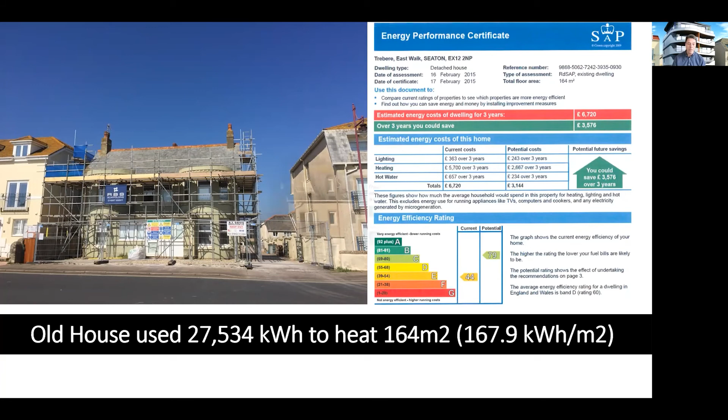I made the decision to build to Passivhaus standards, thanks to Emma Osmundsen, who I first met back in 2014 at a CPD in Coventry. That motivated my decision. We then appointed Thomas Gartner from Gale & Snowden Architects, and he just simplified the process and encouraged me to retrain as a certified Passivhaus consultant. Our scheme provides 8 homes on the same land footprint and cut the energy consumption by 91% compared with the old house based on EPC data.

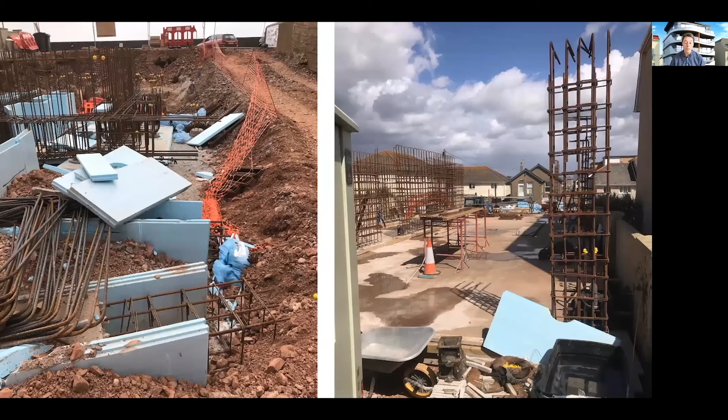Classic Builders commenced on site in March 2018, then managed this tight site with precision, delivering us an excellent building. We arranged a Passivhaus contractors training day with Warm in Plymouth for Classic Builders and their subcontractors. Collaboration and education underpins the success of our project.

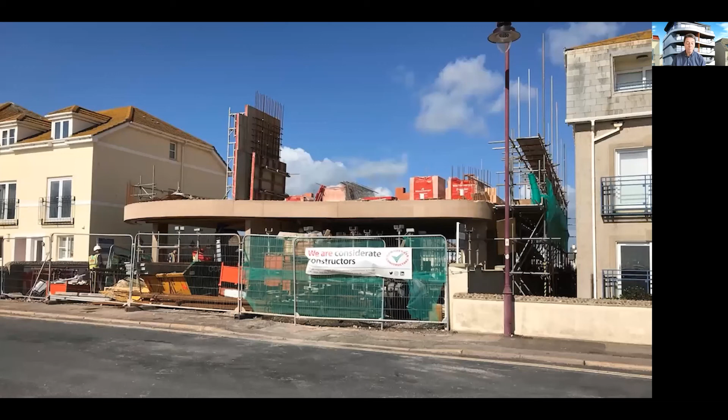All insulation arriving on site was evidenced by our meticulous site manager, Robin Pike, who Classic employed to deliver the project. He became the air tightness champion, taking personal pride with a can-do attitude. We also engaged with the local community to keep them all informed and hosted 3 Passivhaus open days to educate the people on the 30-year-old build standard we were achieving.

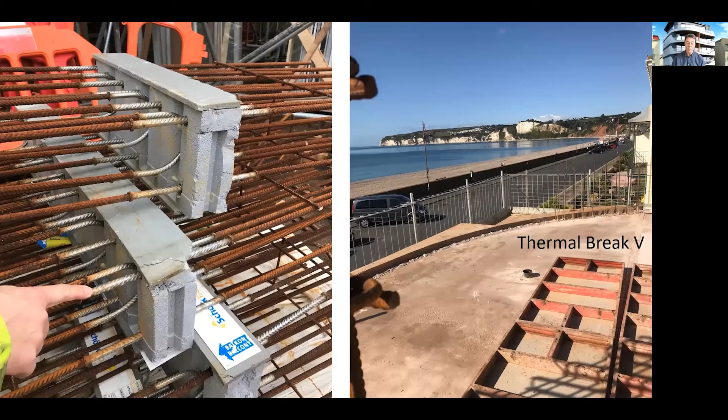Once the first floor shuttering was removed, the curvaceous balcony was released, and we realised the plans drawn by Thomas had finally come alive. That said, curves cost, and the time this detail took to replicate on the next 3 floors was really underestimated. It's the hidden details that add to the building's performance that increase the cost. For example, the Schöck thermal breaks. Superior German engineering does not come cheap. I was convinced that Thomas was just helping the German economy.

The subservient penthouse had to be a lightweight timber frame insulated with Warmcel. The heavyweight main structure adds thermal mass to assist the building in maintaining constant temperature between seasons. This also helps with the overheating, as do the large south-facing balconies. Overheating in the penthouse was mitigated with external roller shutters on the large south and west fenestrations. Cross ventilation also assists, and this was evidenced last summer. 30 degrees on the beach and a comfortable 24 degrees in the penthouse.

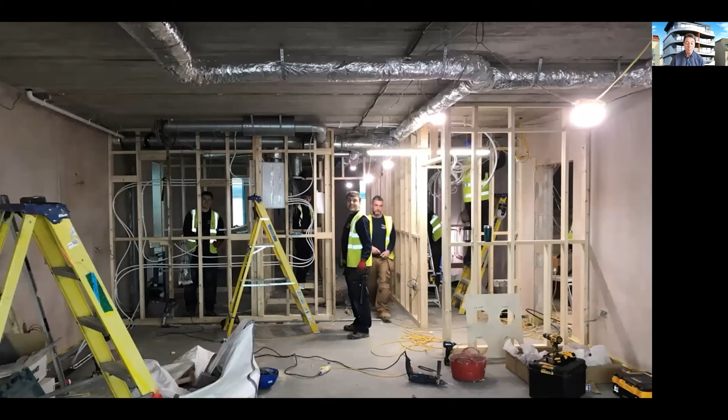The mechanical and electrical specification we did ourselves with assistance from our subcontractors. Total Home Environment supplied and designed the MVHR, and Forwards of Sidmouth installed it, along with all the electrics, plumbing, kitchens, bathrooms and tiling. The MVHR combi provides 50% of the heat demand, with the balance made up from electric towel rails. We are gas free. This prompted the decision to install solar panels that, with the low energy demand, became the first certified multi-block in the UK to achieve Passivhaus Plus status.

To achieve this, we had to get 49 solar panels on a limited roof area. And as the system designer myself, I found this one of the most challenging schemes I've put together, especially with the roof windows that help provide every single room on the top floor with natural light and also roof access for maintenance. We then decided a fixed handrail would be required to meet our CDM obligations, thus ensuring safe maintenance. There's even a tap on the roof to clean the solar panels.

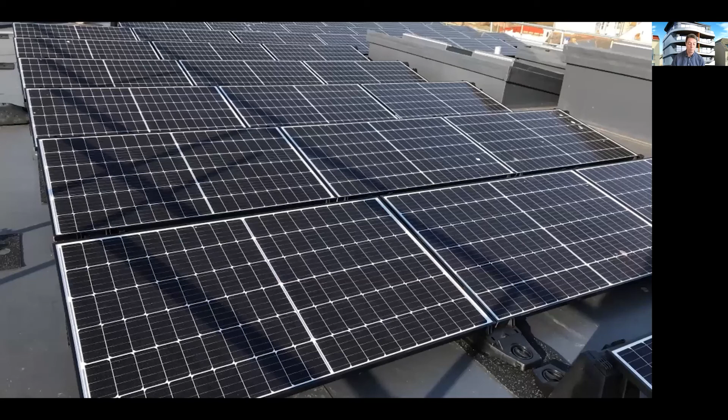The incoming electric is communal, so that any self-generated power can be used by other apartments and also electric car charging in the parking bays. This minimises our export back to the grid, because the more we can use, the better we are for it. All apartments have half-hourly import-export meters that are on our own cloud-based platform, so data is readily available. And this shows that generally we are on target for forecast versus actual consumption.

Amazing west views from the penthouse, as you can see, straight across the beach. Due to COVID, this was the last apartment to sell in February 2021. The exterior is clad with zinc shingles that offer a 30-year marine grade warranty. We recycled the timber from the old house to build a pergola. We also rebuilt the front wall from the stone we saved from the demolished house. Very sustainable to help offset the embedded carbon in the construction phase, but also exceptionally hard work.

We even had some celebrity visitors arriving on their own eco-transport for unexpected site tours. And as you can see, that's where my picture today comes from. Certify your build and buy a plaque. If you built a Rolls Royce, you would not want to leave the badge off.

We thank all of our team and our neighbours with a beach party in September 2019 that, due to the weather, was almost rained off. Fortunately, the unsold apartments became the new venue that day, and as most still had flooring to be specified by the end buyers, there was no damage done. All 8 apartments are now sold. My investor has all his money back with interest and a profit share. And may I take this opportunity to thank everybody involved with this project for an outstanding job.